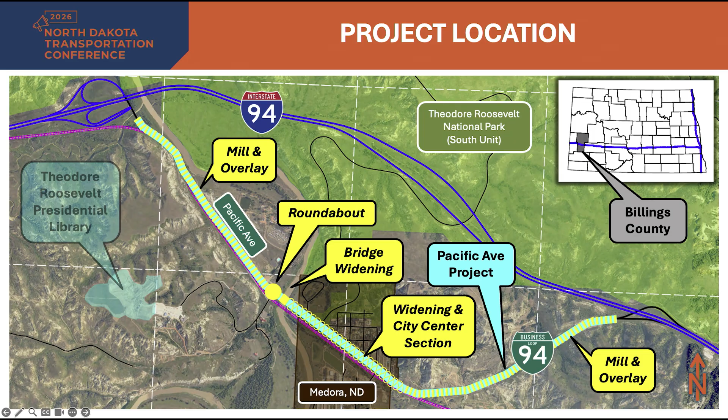The second project in Medora is Chateau Road and began the winter of 2023. In December of 2023, Billings County submitted a grant application to reconstruct Chateau Road. In February '24, the county was notified that they'd been awarded the grant.

The engineering services RFP was advertised in April. KLJ was selected to complete the preliminary engineering and was under contract by June 5th of 2024, roughly 6 months after it was initiated by Billings County.

Chateau Road is the only point of access to the Medora Musical, Burning Hills Amphitheater, and the site of the Presidential Library. The project is about a mile in length, and the reconstructed road will allow for year-round use for these facilities.

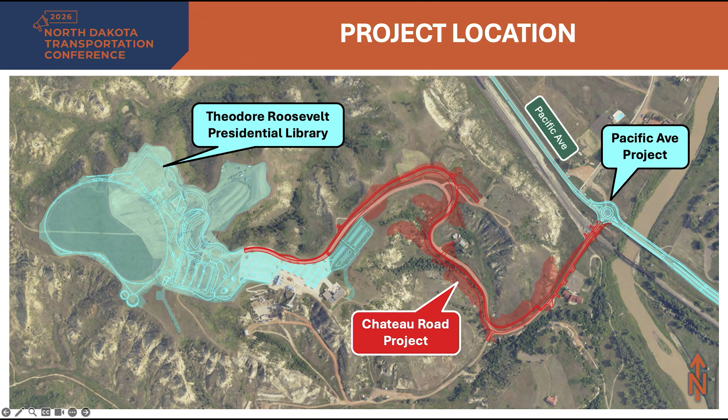There's a number of property owners and stakeholders located on this relatively short reconstruction project. We have a short video to illustrate the location of each.

First, we have the adjacent Pacific Avenue project. We have the BNSF railway crossing, an at-grade railroad crossing. We have the interpretive center for Chateau de Mores, and the historic site for Chateau de Mores.

The Medora Foundation service road that's used to access the back side of the amphitheater property. A residence owned by the Medora Foundation that houses some of their staff. The Medora Cemetery.

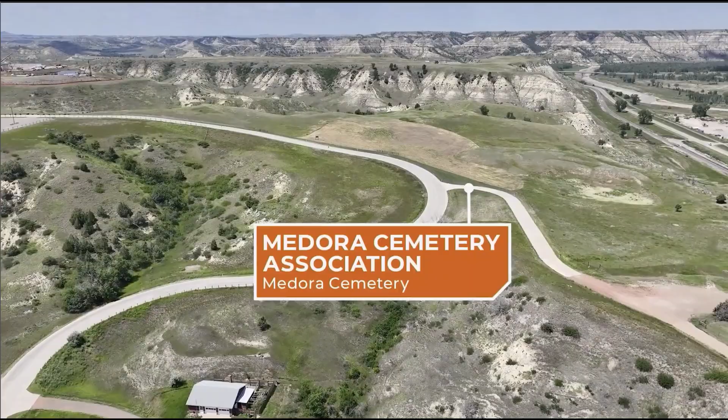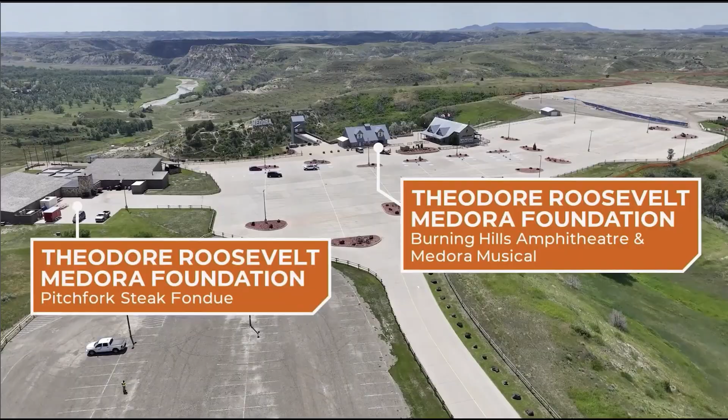Of course, the Theodore Roosevelt Presidential Library under construction. And then the Medora Foundation Pitchfork Fondue and the Medora Musical Amphitheater.

Oops, went too far, sorry.

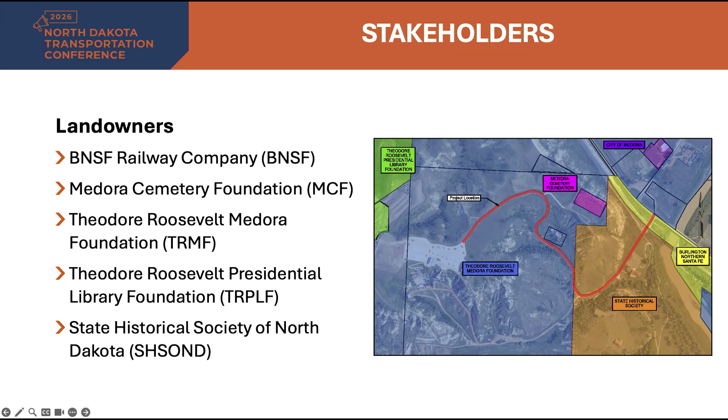All right, we worked with a number of stakeholders directly involved or impacted by the project. The landowners included BNSF, Cemetery Foundation, Theodore Roosevelt Medora Foundation, Theodore Roosevelt Presidential Library, and the State Historical Society of North Dakota.

Other stakeholders that had interest in the property, locally, included the Theodore Roosevelt National Park, City of Medora, and Billings County, with 3 representatives for Highway Department, Sheriff's Office, and Emergency Medical Services. Other agencies involved were Fed Highway and SHPO.

And the last stakeholders included BNSF. They had an at-grade crossing near the proposed roundabout. And FRA was involved with the railroad due to the fact that it was classified as a quiet crossing.

All right, good morning here. So I just want to give you a little bit of a feel and perspective on some of the challenges we faced on this project.

It was probably one of the more challenging projects that I've done in my career, and even though it's not a very long project, everything that you could potentially have on a project was involved on it.

Not only is this project directly affecting the Medora Musical, which is obviously a very important venue to all of North Dakota and very famous, a negative impact from our project to them would be very detrimental in many ways out there.

And this was the only entrance in and out there, so it had a huge impact on them, and we had to mitigate that as much as feasibly possible out there.

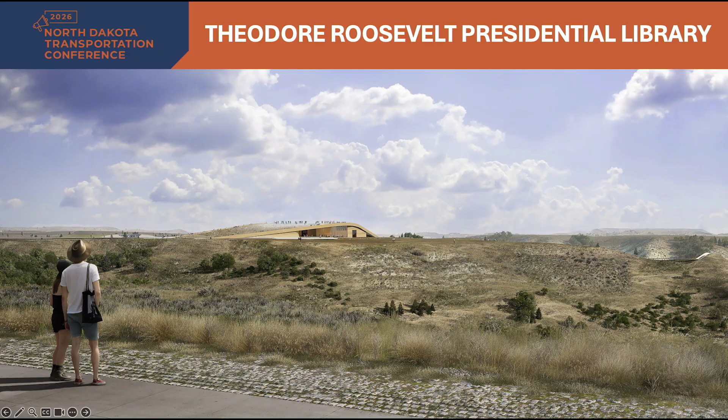We have the Presidential Library being constructed out there, a huge item of national significance, with a grand opening on July 4th, '26, and a potential presidential visit. So there was no room for late delivery, no tolerance for not having this done on time. We had both a start and ending date set in stone, so we had to deliver it in the time frame possible and bring the resources as needed.

This project was released on April 3rd of '24. About a month and a half later we were selected as the consultant, and we were under contract within a couple weeks after that. On June 5th we could finally start, but that date is almost halfway through the year already, so we had to really start running on the project. To accommodate the final grand opening date, we had to get this project under construction as soon as possible in 2025, even though we were starting halfway through 2024 to get the design permitted and everything built. That was quite the challenge, and no late deliveries were allowed.

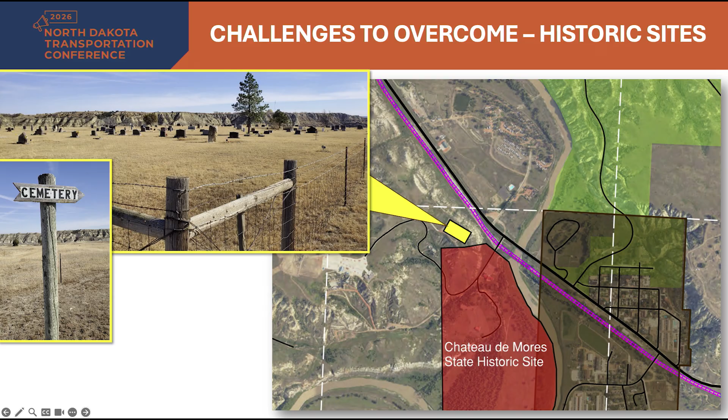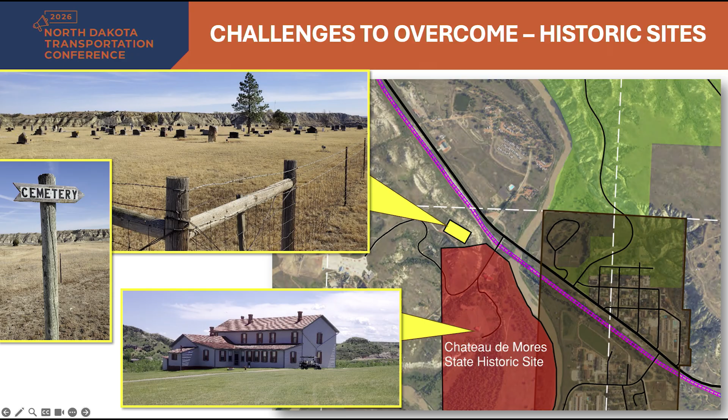There's also a lot of historic significance out there. We have the Medora Cemetery, which we obviously cannot impact whatsoever, so that was one constraint. We also had the Chateau de Mores State Historic Site, which encompasses about a third of Chateau Road, and the road sits right on that site. So any impact to that site — well, the road was going to impact it no matter what.

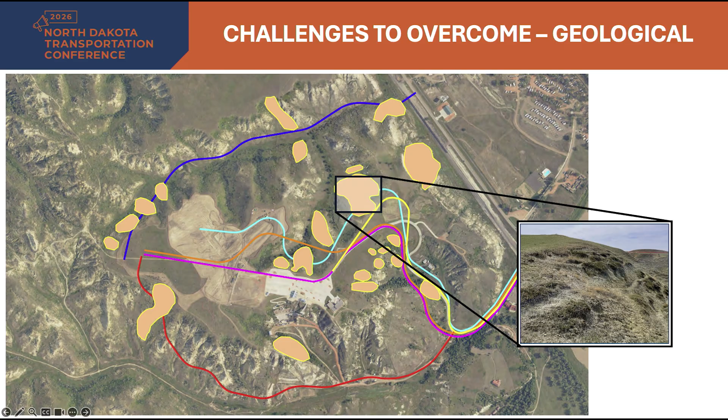We also had the Pitchfork Steak Fondue happening up there before the Medora Musical, so we had early time constraints as far as noise, dust, and other construction impacts.

Another wonderful position we were put in was that there was no alignment established for the project. In the RFP, a study had been done on some alignment opportunities, shown here as the colored lines, but the DOT had no preference. They basically came to the consultants and said, tell us what would be the best project to build here. So we had to select an alignment, build a case for why it would be the best option and why it would be buildable, and prove it up in the RFP process. It was a big investment for us as we were chasing it.

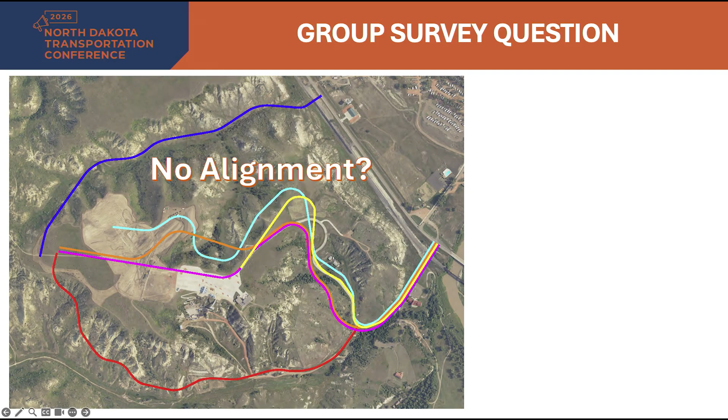So there were a lot of restrictions. There was no alignment. We had an adjacent cemetery. We had the Chateau de Mores State Historic Site. And you might not know this came up during design, but there was actually no existing right-of-way for Chateau Road on the Chateau de Mores site — it was there in trespass, and we were designing a project on private state historic land. It was a mess, honestly. We also had noise restrictions because of the musical and the fondue, work time restrictions, road closure restrictions, and we had to maintain two-way traffic at all times. We had unstable geology, and on top of that, we also had a railroad crossing to deal with — we had to redo that entire crossing.

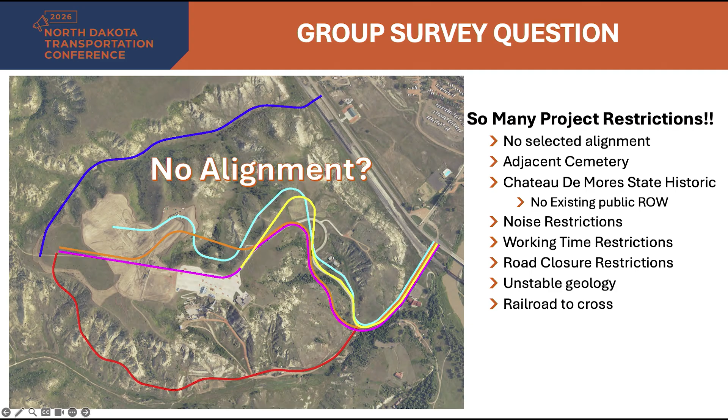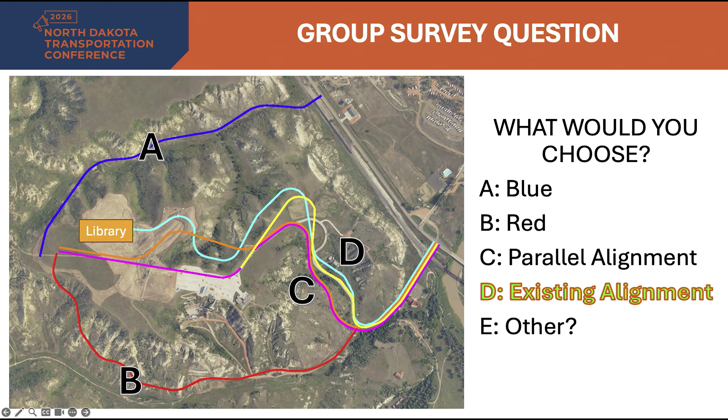So we actually chose the existing alignment as probably the best option with the least unknowns. Looking at option A, this is a photo from Pacific Avenue looking up that valley that option A would have gone up. We would not only have a new crossing with the BNSF Railroad, which itself would be extremely difficult, if not impossible, to achieve unless you did a grade separation, but you have this undisturbed valley that we would have to cut a roadway into, and who knows what geologic and cultural items we would encounter while constructing and designing this.

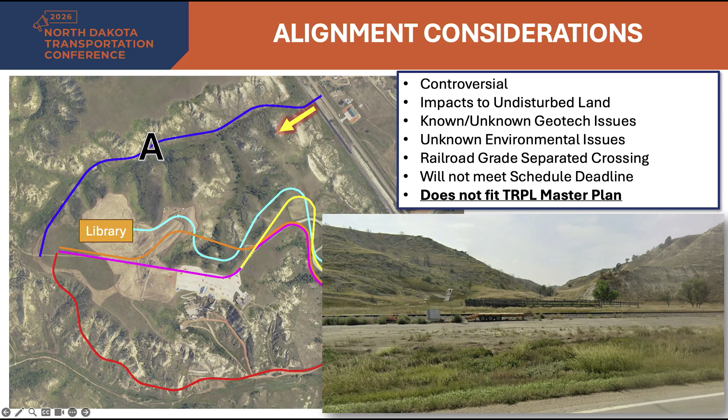So we did not really feel this was a very viable option. In addition, the Presidential Library was right at the top of the hill of this valley, and it took advantage of the view down that valley. Us cutting a scar for an entry point going up the valley there, right where they're taking a panorama towards the national park, was really just not fit with the master plan for the site. So we ruled out option A as something we thought would be achievable up there.

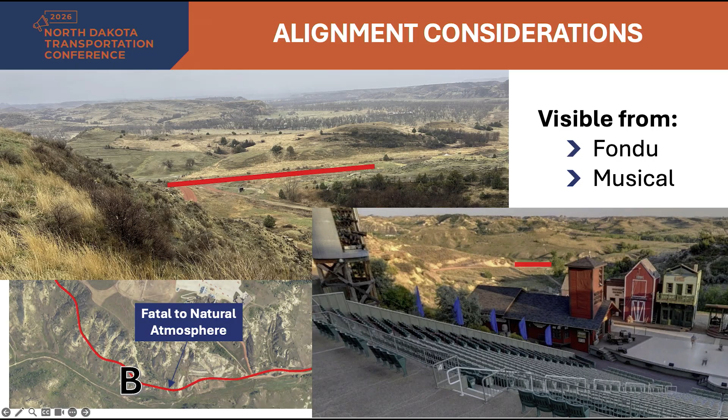Imagine being there in the evening, it's getting dark out, the musical is playing, and all of a sudden you see headlights catch the corner of your eye driving up - it would really hinder the wonderfulness that we all enjoy with the Medora Musical out there. It just was going to be fatal to that natural atmosphere you have out there. We took that off of the options.

There was also some parallel alignment options, option C here, which I won't go into the details on. John's going to actually elaborate a little bit more on what his thought process was on why we could and could not go with those options.

And so we were left really with option alignment D, the existing alignment, or as close to it as possible, to achieve the project that was buildable in the time frame we have and had the least unknowns along the project.

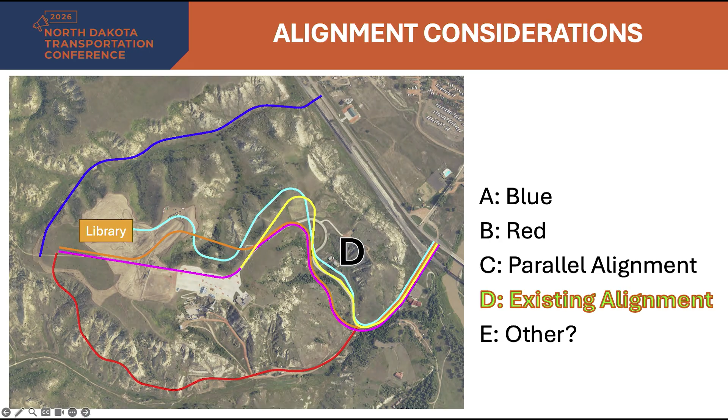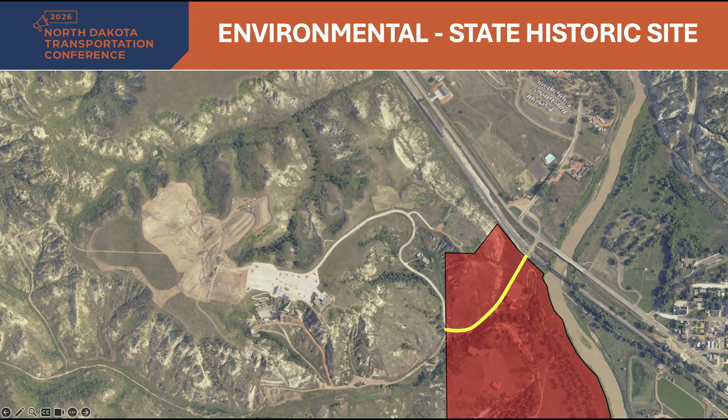So I wanted to step back a little bit and talk about the Chateau de Mores site. Since the entire Chateau de Mores site encompasses about a third of the roadway, and goes all the way up the hillside there, we had no right-of-way to build the roadway within here. That was a problem - we can't even bid a project if we don't have the right-of-way for this. And any impact to the Chateau de Mores site was an impact to a site of state historic significance.

That would automatically be a 4(f) de minimis impact to the project. So we had to do a de minimis process to prove up that we were minimizing the impacts to the site. Here's a view of what that looks like from an aerial perspective on what was included within the Chateau site. You can see there's the big bluff, the roadway, and we had to widen the roadway going to the right side here because we had a deep valley and the visitor center on the left.

So we had to cut into this big hillside, but we still had to minimize impacts. We had to do drilling, geotechnical borings on that hillside to know what kind of slope we could achieve while still minimizing the impacts. The conundrum was that doing those geotechnical borings would itself be an impact to the site. So we had to do an additional CATEX just to clear us to do our geotechnical investigation, so we could do the de minimis process to finish up the CATEX process for the whole project.

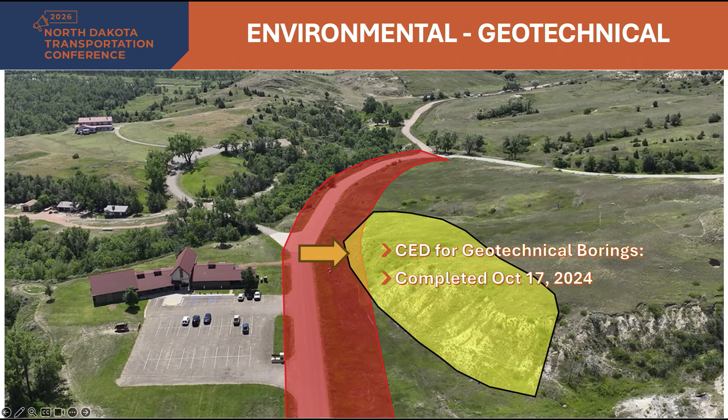And so it was a kind of circular process that we had to work through to actually gain access, to prove up our alignment, to do everything we needed to complete the design and the environmental permitting. We were finally able to get that CATEX by definition by October 17th of '24. But again, that's getting late in the season here and we're running out of time to build the project.

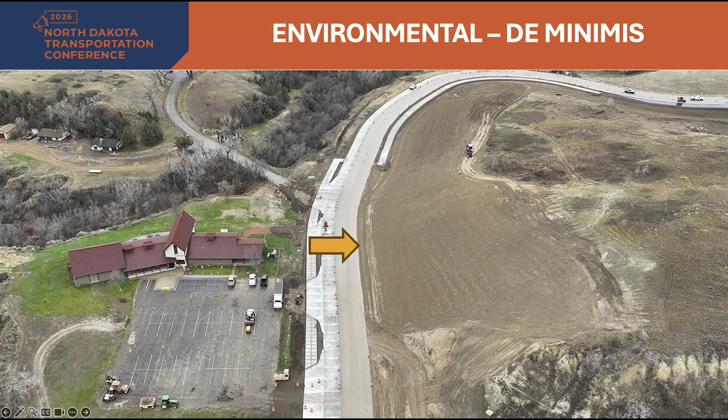What it ended up looking like - this is a picture towards the end of '25 when the whole roadway on the lower side was built and we have all that sloping done. You can see the difference of how much earth we had to move out of there. It was pretty significant, and so quite a bit of impact.

And so the 4(f) de minimis process was a really lengthy process we had to go through, kind of challenging. That's the first time I had done it personally.

But initially when we did that 4(f) de minimis, we had to bring it to the North Dakota Department of Transportation. Their environmental staff had to approve it. From there, we had to submit it to the State Historic Society of North Dakota, who were the owners of the site here, the Chateau de Mores, and get them to review it and approve it. And from there, it would go to SHPO, the State Historic Preservation Office, for them to review and approve. Once we got their approval, we would then go to the FHWA, Federal Highway Administration, to get their approval.

And if at any point in time somebody had comments on the process or on the document or what we're doing, we had to basically start over in the process and get approval from each entity again before going on to the final entity to get that approval. But we were able to achieve that FHWA approval by April 22nd of 2025. So you notice that's spring of 2025. That's quite late in the process here, but it took a long time to get to there.

Another challenge we had is, as we're getting into the design of this, it became very apparent very early on that we weren't going to have a bid-ready project. We wouldn't have a contractor on board to start tree clearing for northern long-eared bat before the clearing window would be enacted and we couldn't clear anymore.

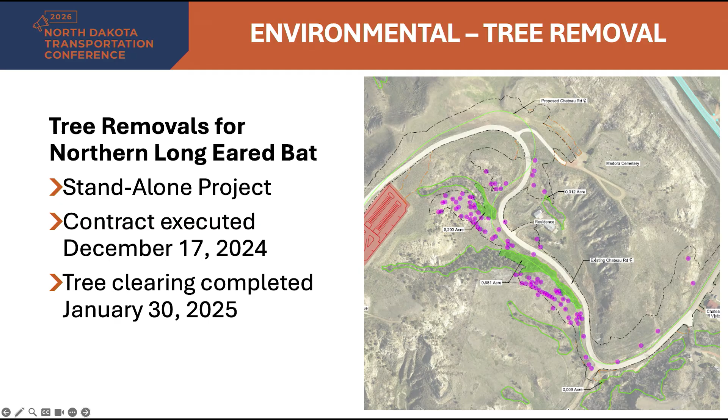And so in order to allow the project to continue or to start on a good foot, we had to actually get out there and remove all the trees that were going to be impacted before construction, before we had the main contractor on board. And so we had to do a mini standalone project, bring that to bid during the winter of '24-'25 just to do the tree clearing out there, which we were able to accomplish and get completely cleared by January 30th of 2025. So there's just so many little steps and little things we had to predict to get this moving along.

We moved into our railroad coordination toward the early fall of '24, and we were able to get our CATEX by definition for the soil borings so we could continue and understand what we were allowed to slope the roadway embankment to, and that would prove up our alignment process.

And so, with that January 31st CATEX, we moved on to finalizing our plans two weeks later. We were progressing the plans as best we could, as fast as we could, to have those ready for bid-ready final right after the CATEX was done, and that happened in February, and then bid ready, got everything signed and approved by the end of February. And at this point, we're still working through the de minimis process, trying to get these approvals, and timeline is ticking, and we're getting a lot of pressure here.

So to start with, we had to redefine the project limits. We had to discuss and confirm where we started from. The project originally began at the top of the hill at the parking lot entrance, and projected down the hill to the intersection of Pacific Avenue. That was the original limits. Halfway through the project, we added an extension within the parking lot itself, bringing the total to a little over a mile when all said and done.

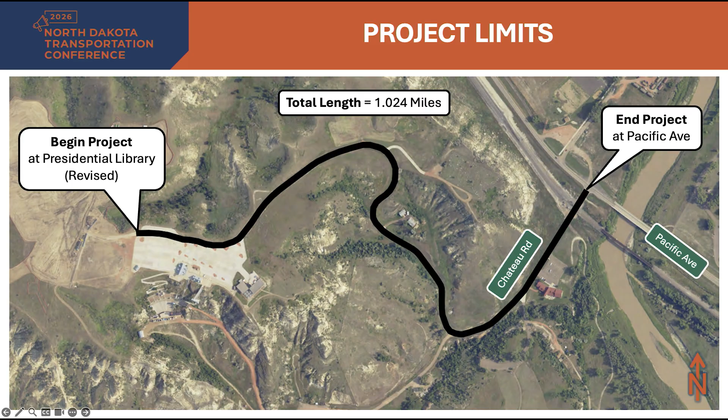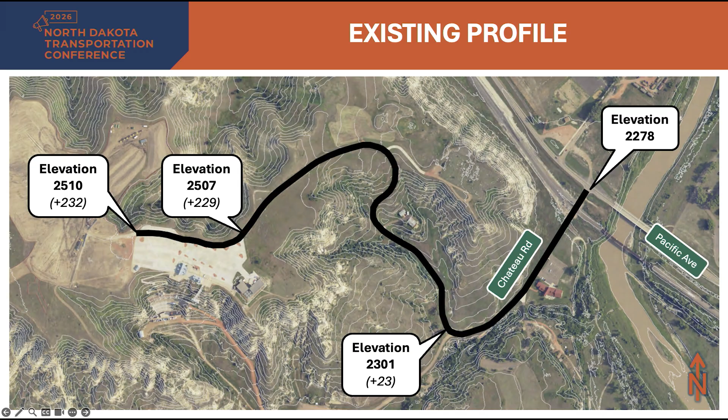Something unique about this corridor - there's over 232 feet of elevation rise from start to end on this alignment, and that's only a mile. That's pretty substantial for North Dakota. The existing profile grade wasn't a consistent slope. The green areas were less than 8%, the yellow areas were 8 to 12%, and the reds were the steepest at 12 to 15%.

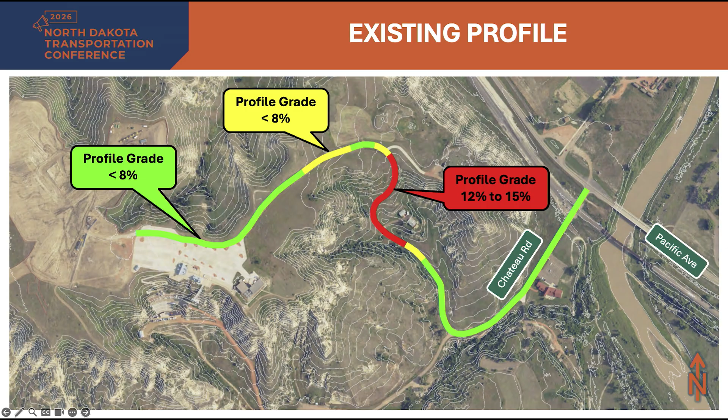As Adam and Chad mentioned earlier, we did not have a defined alignment or a defined typical section, so we needed to analyze alternatives based upon project goals. I'll summarize some of those goals: we had to define our project schedule - we had a short time frame not only for design but for construction. It needed to be buildable. We needed a desire to flatten our roadway profile grade.

I mentioned the 15% grades - we didn't want to hold those. We wanted to increase the horizontal curve radii if we could, or match what was there at a minimum. We wanted to increase road capacity by increasing its width. There was a desire to preserve the landscape - this is a special place in North Dakota, and we didn't want to put scars in the slopes just because. There were also ridgeline ordinances - imagine a bunch of headlights protruding into the national park across the road, that wasn't a desirable goal. We also wanted to add pedestrian accommodations, shared use paths, and of course we had to be cognizant of construction costs as we looked through our options.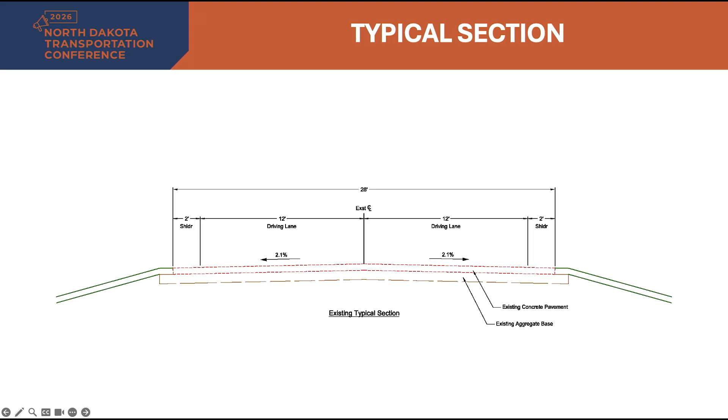So what did we start with? Existing Chateau Road had two 12-foot lanes and shoulders, and it was concrete pavement. When we first laid out some proposed typicals for discussion, these were the two that we threw out - two different situations, one a standard ditch section, and the bottom one had a curb and gutter section. Those were the differences between them, but ultimately they had a lot of similarities: two through lanes, one in each direction, and a shared middle lane.

That middle lane was implemented to accommodate two things. One was emergency service access - when there's a lot of queuing of vehicles on this road going up or down the hill, it's difficult for emergency services to access the site, since it's one way in, one way out.

That third lane in the middle was there to utilize for emergency services if needed. It also helped with off-tracking. A lot of large vehicles, whether it's a camper or a semi-trailer, these are tight radii, and the extra lane helped with off-tracking.

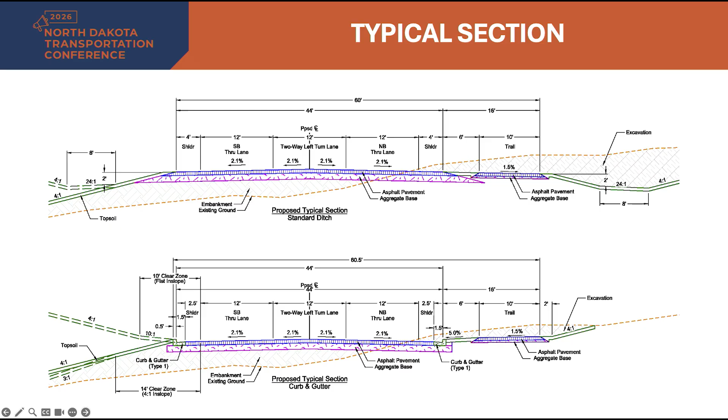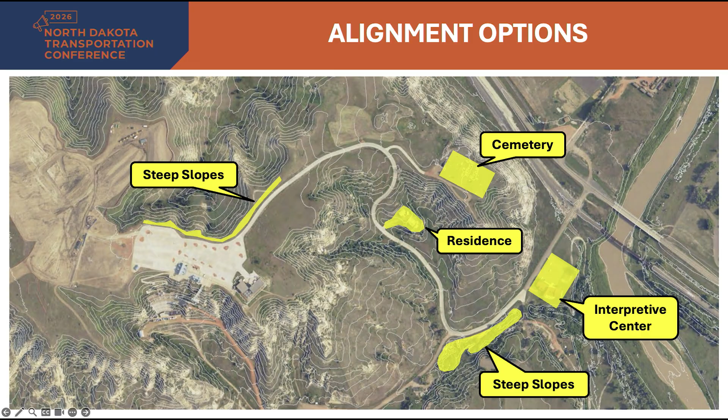Now the alignment was the next thing we had to lay out. We knew we had restrictions. The yellow areas were items we needed to avoid, including the interpretive center, some steep slopes, the residence, the Medora Cemetery, and additional steep slopes adjacent to the existing parking lot. So we started with laying out a couple of alignment options for the field review.

And then we, of course, wanted to identify a flatter grade profile option. That happened to be our orange alignment, which was an 8% profile grade. Now looking at it, it doesn't look very great. Ultimately, when you have your start and end stops fixed, the elevations were fixed, the only way to flatten your profile is to have a longer road. So this was an illustration, just something we wanted to throw out there to show people what it would take to get to something at 8%.

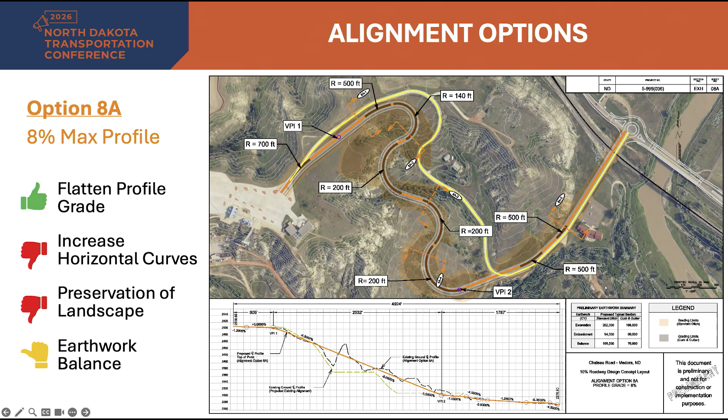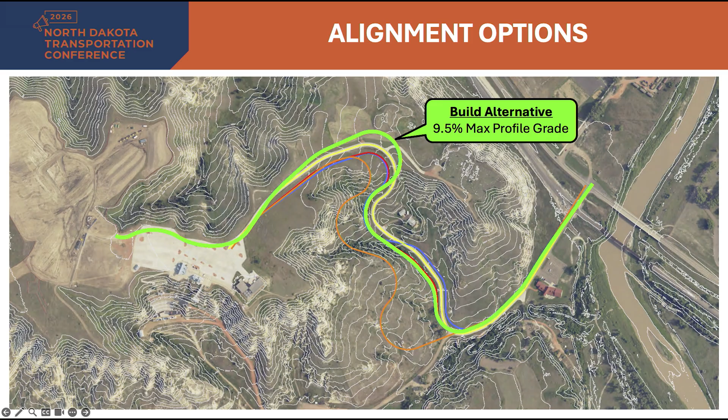Then we had our field review, met with stakeholders, had numerous coordination efforts, and formulated an optimized alignment that ended up being our build alternative. This had a 9.5% max profile grade, and it's very comparable to the red alignment, except it did add one additional crossing of the existing road, just south of the cemetery. So not only did it cross the existing road at the service road, it went up the hill and crossed one additional time.

That allowed us to flatten the profile grade even more. It lengthened the roadway length and increased the horizontal curves, or matched the existing curvature. It did have a much better job of preserving the landscape, and the earthwork balance was much better. In this case, the length of the max profile grade was only 1,500 feet at 9.5%, with the rest at 7.2% or flatter.

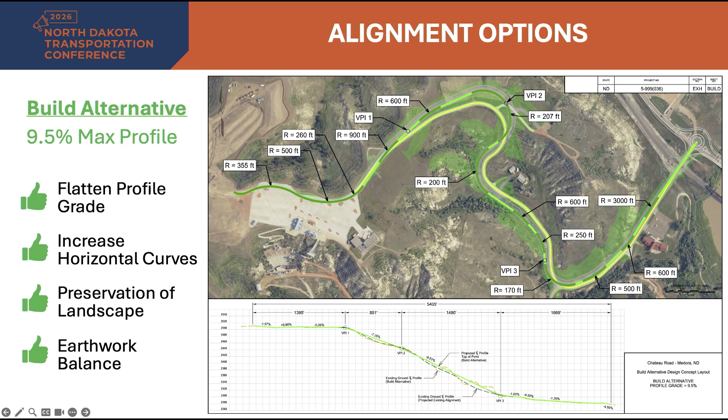Next was the typical section. We had many coordination efforts with stakeholders to determine what the build section was. I'll highlight a few things here, starting with that existing center line, just to highlight the shift. Not only was it a shift, but there was a significant vertical difference between the existing and proposed alignments as well. The proposed alignment would be on the right side in green. Now, what did we do for lane assignments?

Those two through lanes, one in each direction, were held, and then the 12-foot median in the middle was also held from the preliminary alternatives, again for emergency services and off-tracking purposes. The material selection for the pavement was 8 inches of concrete on 8 inches of base, and we also had a 10-foot wide shared use path implemented on one side of the road that was also concrete with aggregate base, and then a 6-foot grass boulevard in the middle. Notice there's no curb and gutter on here. That was not selected. We went with a standard ditch section.

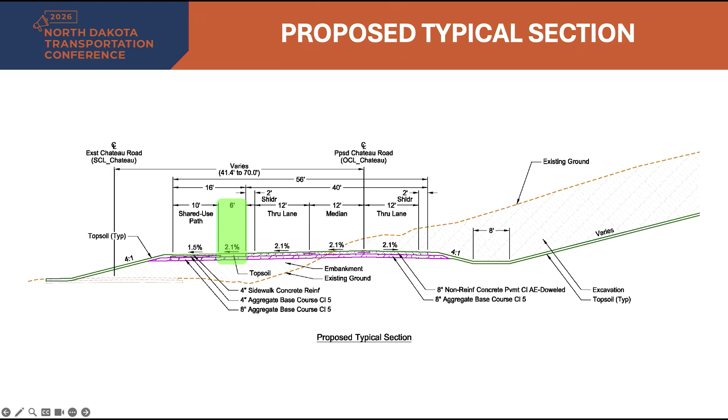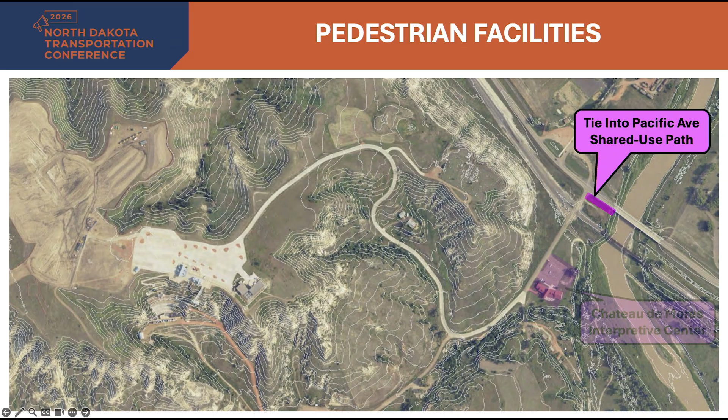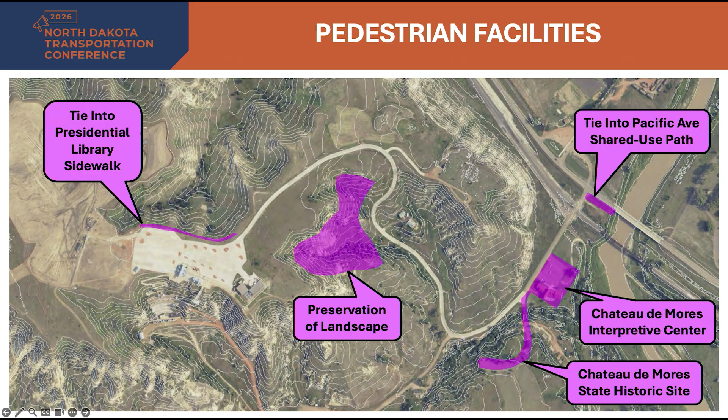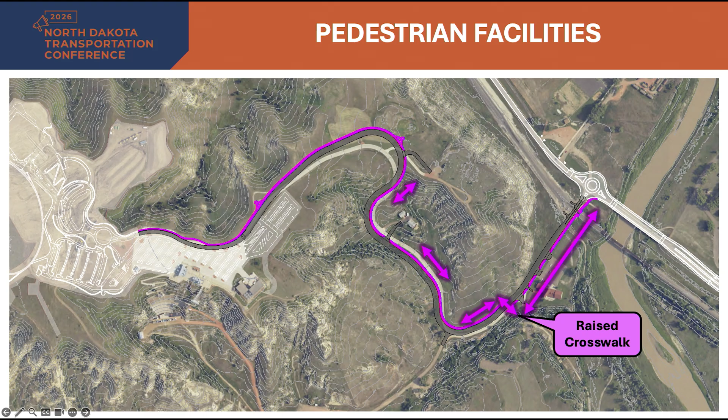So this was the end result of where the shared use path ended up, the pink outline in this graphic. Starting at the bottom of the hill and working our way up, we're on the south side, or the east side, of Chateau Road. That allowed people to get directly to the interpretive center and to the historic site. Then we added a raised crosswalk so people could get across the road. The shared use path was on the east side, or the north side, of Chateau Road the rest of the way. That allowed us to preserve that landscape as much as possible, and it assisted with our dirt balance as well. Now we get to the top of the hill, and we also needed to add one additional raised crosswalk so pedestrians could safely access the Pitchfork Steak Fondue and the Medora Musical.

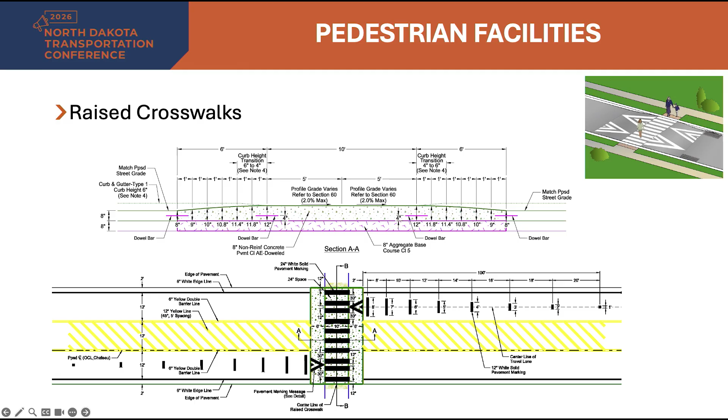Now, I mentioned a couple raised crosswalks. Ultimately, what those look like is what you see here, little bumps, if you will, in the corridor. You see those in residential neighborhoods and amongst municipalities. But ultimately, we wanted to have a physical representation for the traveling public and vehicular traffic that there's a crosswalk here. We put street lights in, we put these raised crosswalks in, extra pavement marking, and followed all the MUTCD requirements just to make it a little safer for everybody.

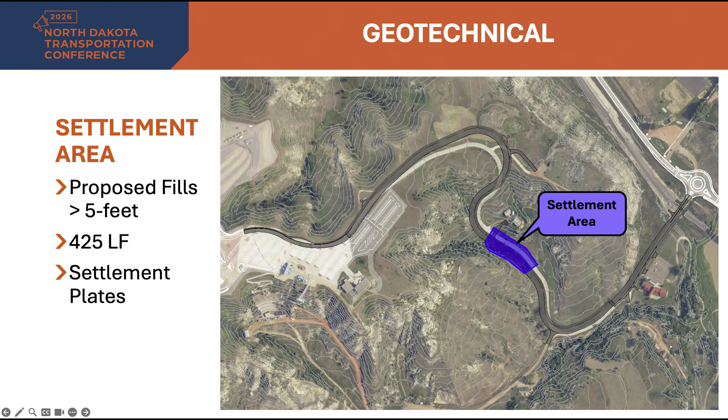Next, we're going to touch on geotechnical a little bit. There were two key features we implemented into the final design, and Shannon and Wilson was the engineer of record for that, and they helped us through this process. Starting with the settlement area, we had an area identified as having a high likelihood of settlement. So anytime we had a proposed fill greater than 5 feet, we wanted to take that into account and monitor it with settlement plates. It was 425 feet in length, and there were 7 settlement plates installed, and those settlements were monitored throughout construction.

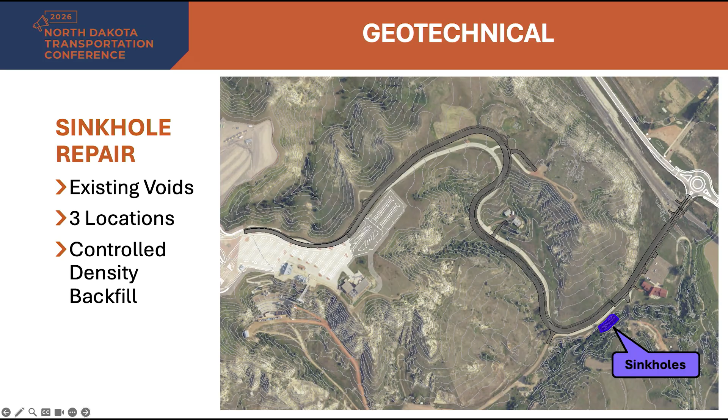Next, we had sinkhole repairs. There were 3 locations that literally had existing voids—you could probably use them as a slide if somebody really wanted to. The end result was we wanted to fill them. We didn't want them to stay in place, so we used controlled density backfill. We put material in them to fill them up, and we capped them with dirt.

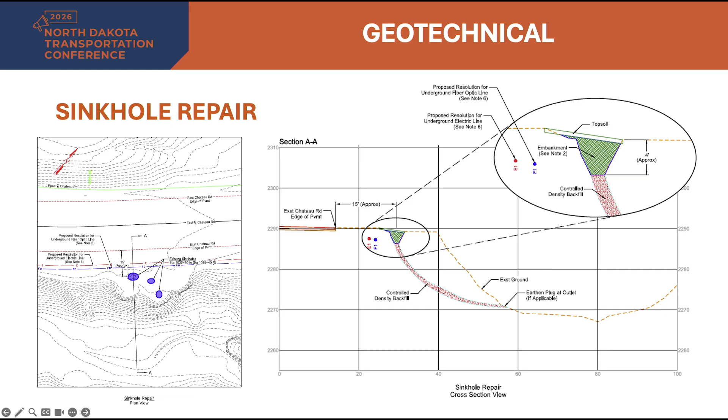Now we're going to dive into some traffic control and phasing. This topic is a big one for the corridor, and it starts with understanding what our constraints were. Number one, we had to accommodate concurrent adjacent projects. So what does that mean on this corridor? Well, starting with the Presidential Library, it was an active construction zone. There were material deliveries coming in with big, large semi-trailers, and a lot of laborers coming in and out every day. We needed to maintain access for them at all times. We had no choice—we could not shut it down.

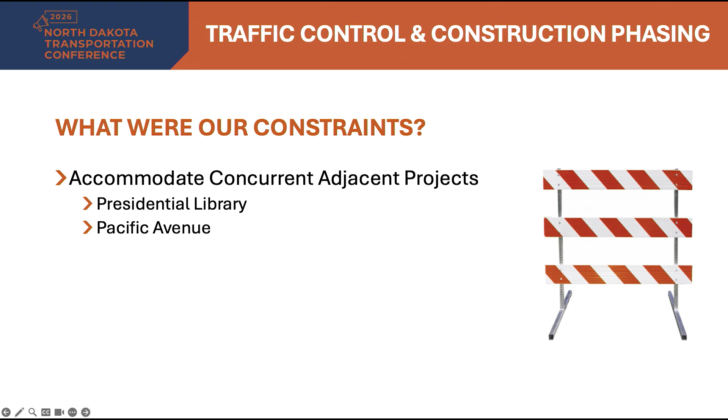Pacific Avenue was on the south side. That was an active construction project with an already selected contractor, an established phasing plan, and schedule, so our phasing had to accommodate and match into theirs to maintain traffic. And then finally, we had the Burning Hills Amphitheater and the Medora Musical parking lot. Portions of that were being reconstructed in order to tie into our project, and we worked with another engineering team on elevations, grades, and storm sewer design. So that was an active design project and construction happening at the same time. We also had the construction schedule—what we designed had to be built, and it had to be constructible within the time frame we had.

We also had the Medora Musical performance schedule, and the musical had to go on. So there were restrictions. When the performance was occurring, or the pitch fork fondue or steak fondue was active and people were driving up the slope to get to the performance, there were certain areas the contractor was not allowed to work in past 4 o'clock in the afternoon. So not only did we have a tight and reduced construction schedule, there also was a reduced amount of hours in the day that they could work.

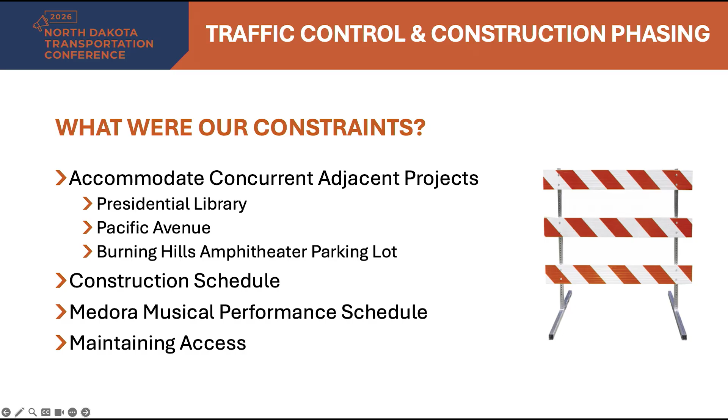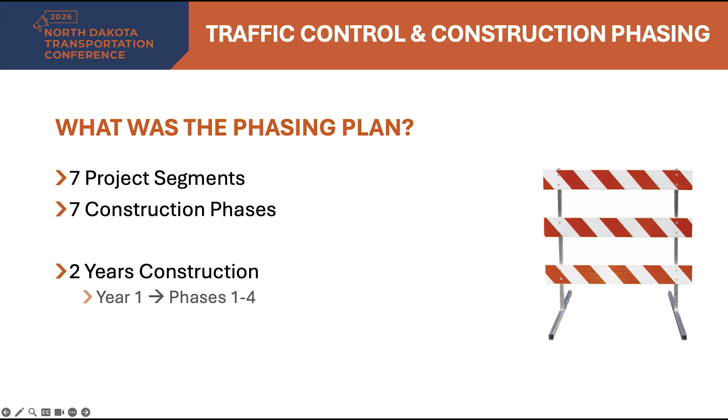And then finally, maintaining access. This is one road in, one road out. We had to maintain access at all times. So the phasing plan ended up with us breaking the project into 7 total segments. It had 7 construction phases, 2 years of construction, but that really means 1 full year plus a few months. Year 1 had phases 1 through 4, and year 2 had phases 5 through 7.

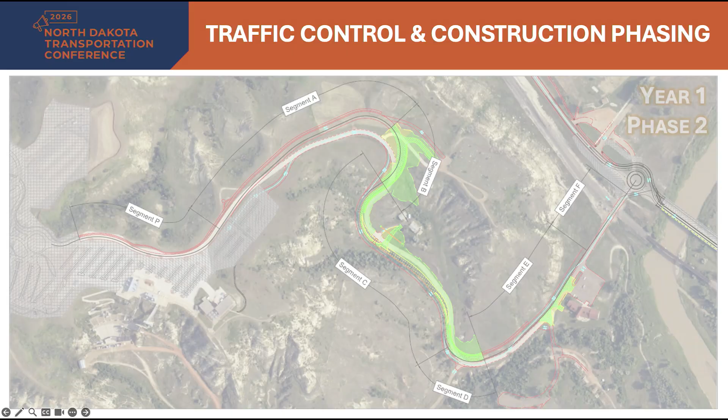Now we're in year 1, phase 2, and ultimately we're working on more reconstruction work of Chateau Road, using a combination of existing and proposed pavement to navigate people through the work zone. So we're going to start at the roundabout and work our way up the hill. First they hit a lane shift. They're on existing pavement, then they migrate to parts of the proposed pavement we built, implementing the bypass if people want to use that to get to the historic site. Then we have an additional lane shift to get them back on existing.

Then we have a bypass to get people from the existing to the proposed pavement we just built in the previous phase. People will drive through that settlement area. Then a bypass for the residents. Then we have yet another bypass to get people from the proposed to the existing pavement. Then they can finally use that parking lot bypass and get to the musical or get to the library. And if somebody did need to get to the cemetery, we had access there through that bypass also.

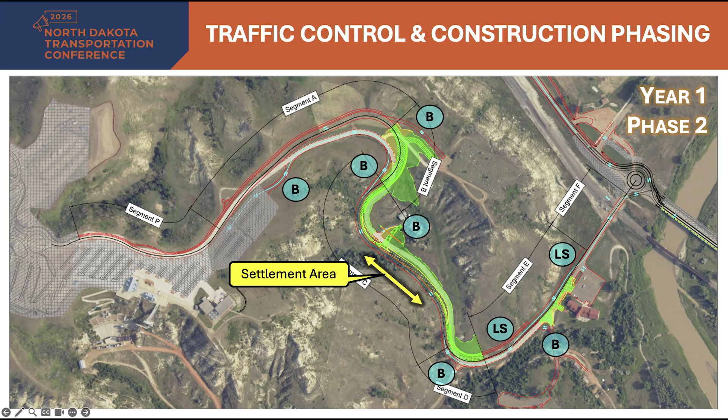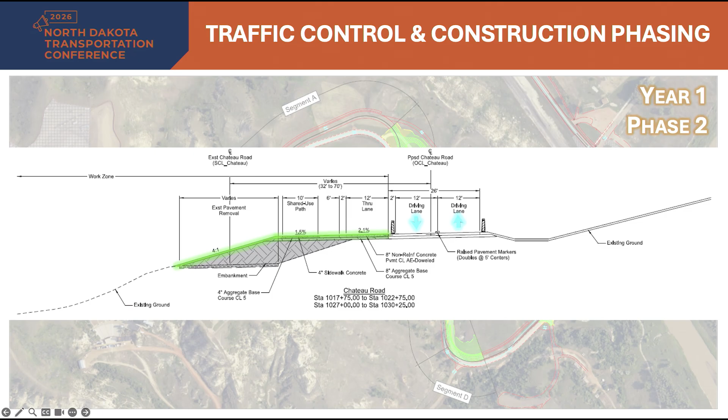This area had the railroad crossing with BNSF. Through coordination with them, we were not permitted to do one of two things: we were not able to widen the existing crossing, and we also were not able to implement a temporary crossing. We had to use what was there, so we were left with no choice. To do concrete pavement, we had to do 24-hour flagging. Once cure time was achieved, we were able to keep traffic moving, but this required 24-hour flagging until cure was attained.

And we had a lane shift to get people onto the proposed pavement, and they drove the proposed pavement the rest of the way up. Now we're in year 1, phase 4. Ultimately, we're working on the other side of the road at the railroad crossing to get that reconstructed and a little sidewalk.

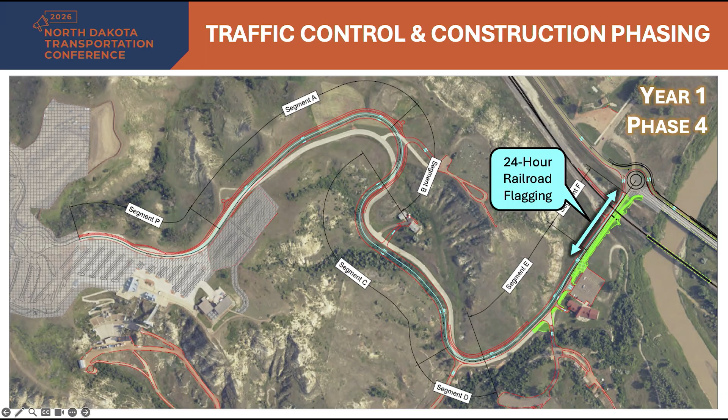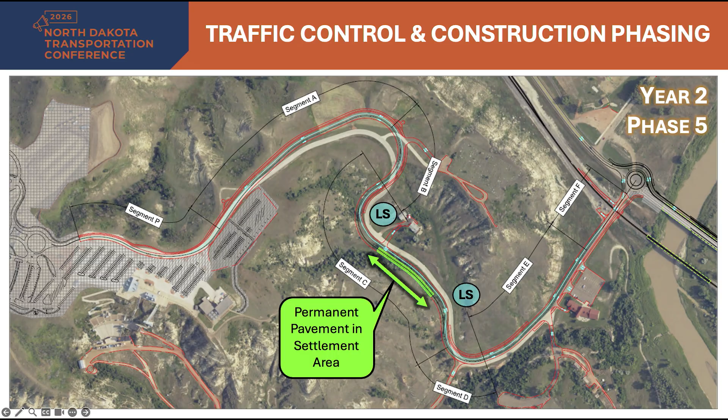So now we're into year 2. Some of this work has not been completed yet, and will be performed this year. Starting at the settlement area, we have to convert that from temporary asphalt to permanent concrete, so we'll implement a few lane shifts, get traffic migrated, and install that concrete pavement. Then we have to do the other side, another lane shift, get traffic moved over, work on reconstructing the permanent concrete pavement and the rest of the shared use path.

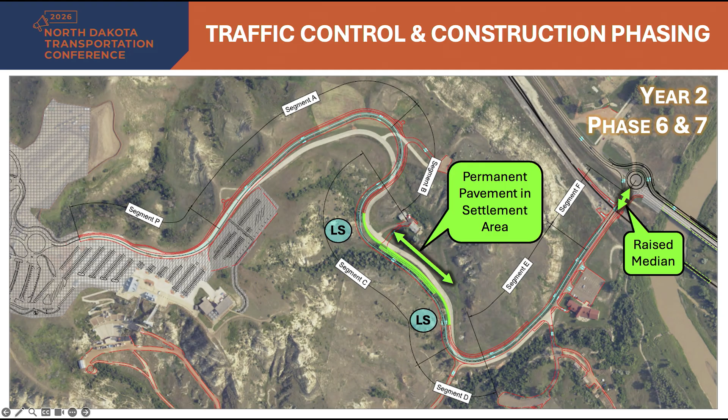Lastly, there will be a little bit of raised median work in order to connect the Pacific Avenue to the Chateau Road project. A portion of that median had to be left out in order to migrate traffic back and forth with the phasing plans. When everything's caught up with each other, we can close those out.

All right, traffic control was a doozy. It was a fun puzzle, but now I'm going to migrate into some right-of-way conversations.

So Adam mentioned before, no public recorded right-of-way along Chateau Road. There were some more questions we had to ask ourselves. Who is the grantee? Who is the grantor? Is it the DOT? Is it Billings County? Is it Medora Musical? Is it the State Historical Society? Who is it? Well, ultimately, the ownership turned out this way.

The DOT is the owner of the construction project. Billings County is the grantee on the right-of-way plats. Billings County is the owner after construction is complete. And then there were a couple maintenance agreements put in place with multiple parties, including Billings County, Teddy Roosevelt Medora Foundation, and the Presidential Library to determine maintenance responsibilities of Chateau Road, not only for snow plowing, but for pavement remedies down the road 20 years from now.

Utility coordination was a very prominent, critical path on our schedule for design. A lot of numbers here, but I'll highlight one. The road was about 1 mile in length. The length of proposed resolutions in total was 2.3 miles, so over double the corridor length we had in proposed utility resolutions.

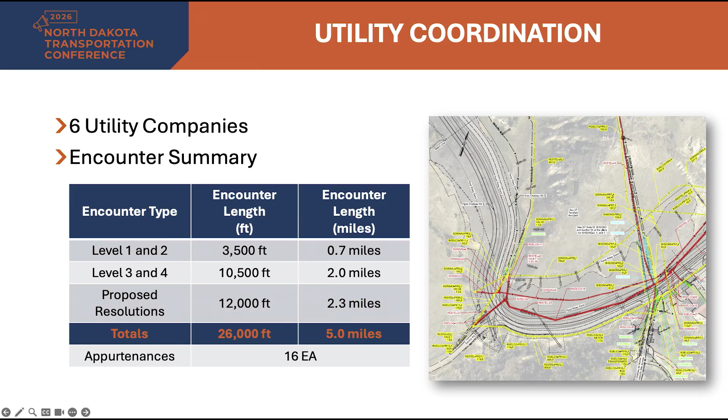So to summarize the utility encounter side of this design effort, I'll summarize it with some of the challenges we faced and overcame. Number 1 was the design schedule. Everyone who's done utility coordination understands it takes time. It takes effort to coordinate with them. It takes time to get permits in place, and it's just an effort.

But we had concurrent design projects running at the same time. So when we first started meeting with some of these utilities, they already had boots on the ground relocating utilities in preparation to upsize their lines for the library foundation. We quickly discovered that where they were putting them, we were going to impact 3 to 4 months later. So we actually had to ask them to stop work and renegotiate with us because we were the last design project to the table. Once we got in touch with them, we were able to coordinate our efforts, but we had to get through that first initial phase of let's stop and let's rethink this.

The State Historical Society had water lines that we were impacting, and they did not have an engineer or a firm on staff or a desired preference of who could do that work. So KLJ took that on, and we made that part of the actual construction contract to relocate those water lines.

A lot of utilities were upsizing their facilities, so when it came to reimbursable costs, we couldn't just go off of the materials they were going to put in the ground. We had to ask and confirm what the existing utility capacity was, so our reimbursable rates were based upon the existing lines, not their upsizing for the new lines.

There were many utility easements and permits that were needed. One of the landowners was the State Historical Society. Those new utility easements had to go all the way up to the North Dakota Governor's office for signature.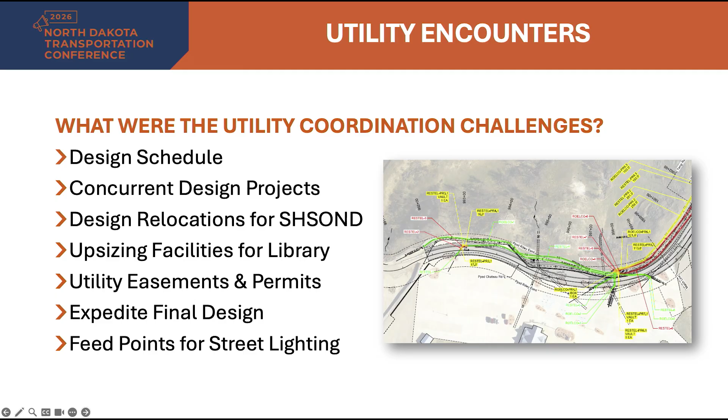That takes time, so ultimately we really needed to expedite our final design even faster than we initially thought. There was time needed to get the utility agreements in place, get our special provisions in place, get permits allocated and signed, and go through the process.

It wasn't 2 days, it was months, so we had to expedite that design early. I'll summarize with a few additional design challenges. We had concurrent adjacent projects, some active in construction with established phasing plans, some still in design. We had to work with all 3 parties, sandwiched between 3 total projects to make ours work.

The project schedule was tight, not only for design but for construction. There were numerous stakeholder coordination meetings, a big effort at the beginning to get buy-in, get feedback, understand what people needed and desired, and formulate decisions. The utility coordination expedited our final design efforts even more than anticipated, and we needed to execute that fast. The construction phasing was a fun puzzle to identify and figure out, a challenge to overcome.

And lastly, the parking lot expansion. That was added about halfway through the project, so not only did we have these challenges, we had to restart some of them—restart the project schedule, reanalyze the stakeholder coordination, redo the utility coordination, and modify our construction phasing to accommodate that extension.

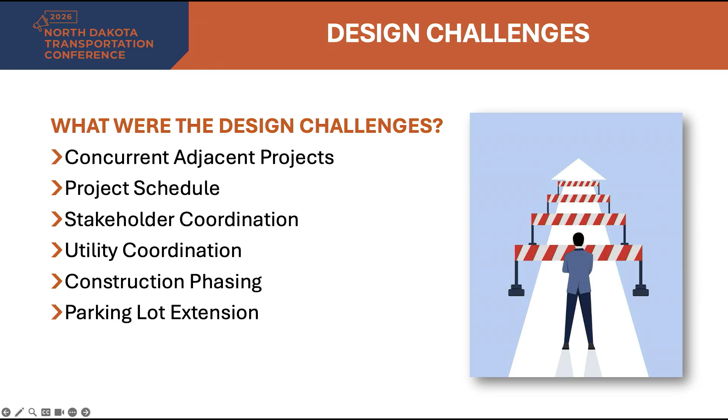So where are we today? What's the current status? The project, year 1, is complete—about 84% of the total construction dollars have been allocated. Year 2 is upcoming, with 16% of that contract left, and a completion date of June 12th of this year. And of course, the Teddy Roosevelt Presidential Library grand opening is scheduled for Independence Day of 2026.

To close us out, I've got a video with drone footage that was flown in November of 2025, with some call-outs. A blue call-out represents material or work performed before the video was collected, or highlights a feature constructed in '25. An orange call-out is something yet to be completed, meaning it will be done in year 2 of construction.

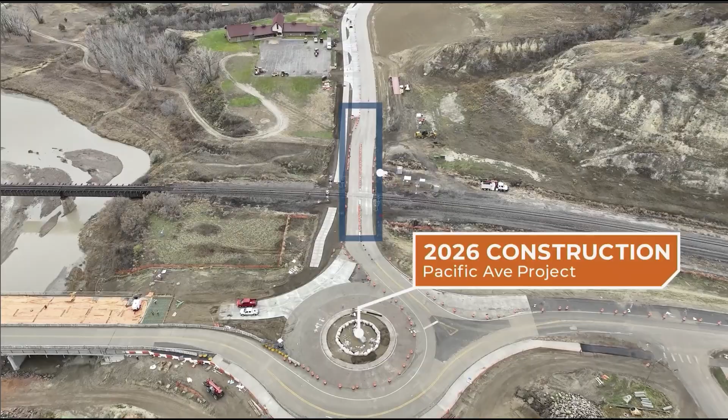That's where the Pacific Avenue roundabout was as of November. That was the 24-hour flagging area, and in '26 we've got some shared use path and grade crossing panels to do at the shared use path. There will be a significant landscape planting effort in 2026 just to beautify the corridor. That's our raised crosswalk at the lower part of the hill.

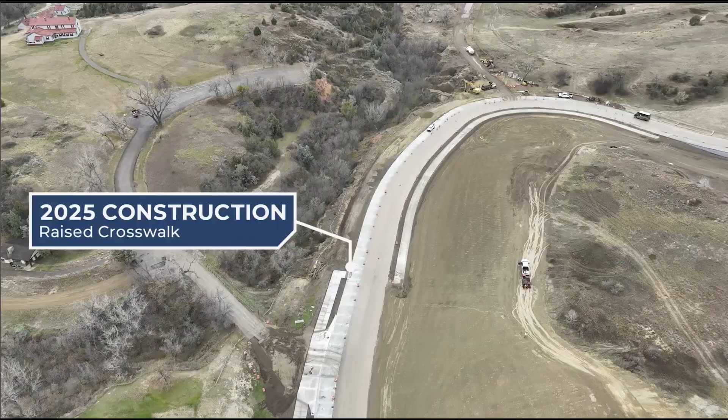In this video, the contractor is working on the service road, which had an additional time restriction—the contractor could not access it until after the musical was closed for the season. There's the temporary asphalt for the settlement area.

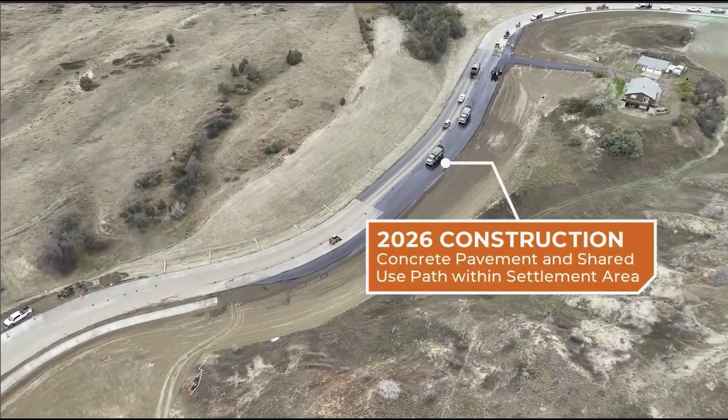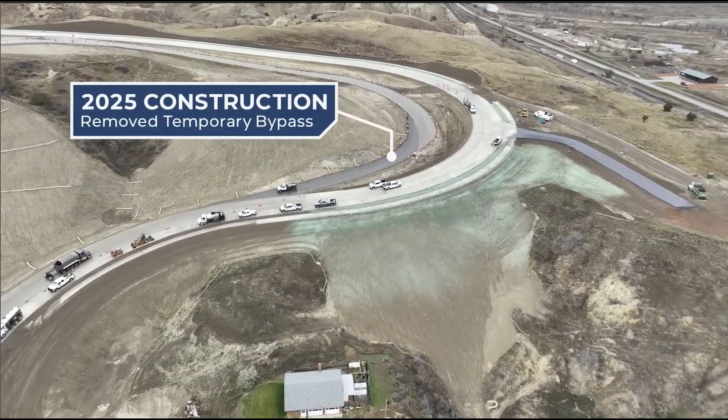As we progress up the hill, you can see some of the bypasses at work, which is a neat factor of this video. In '25, that bypass was removed late in the season, but it was used to migrate proposed pavement to existing pavement. There's a temporary bypass for the cemetery that was removed, some shared use path, and a seating area that was installed.

That would be the existing Chateau Road pavement that was also removed late in the season. And then finally, there's the parking lot bypass that also was removed late in the season.

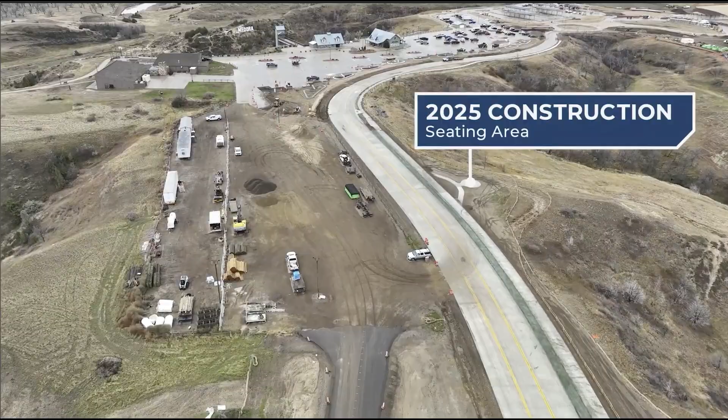I mentioned a seating area a few seconds ago—here's one completed on the right side, upcoming. Think of it as a picnic table seating area that could be used by families for leisure. There's the raised crosswalk that's going to be used to enter into the Pitchfork Steak Fondue. And the parking lot reconstruction at the Medora Musical is active at this time, with some work still to be done there in '26.

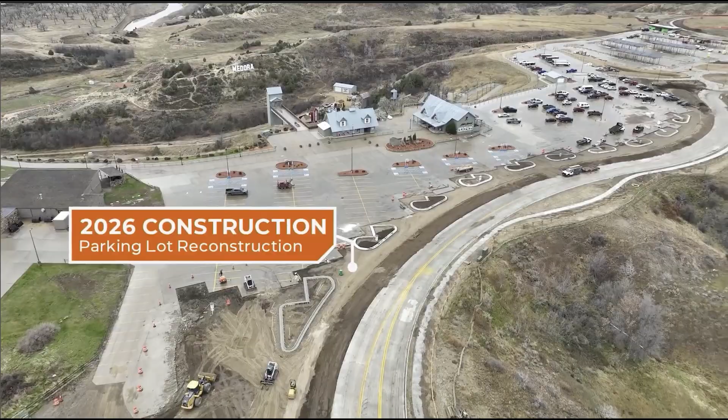We're nearing the end of Chateau Road right there, and then the library is in the background being worked on actively also.